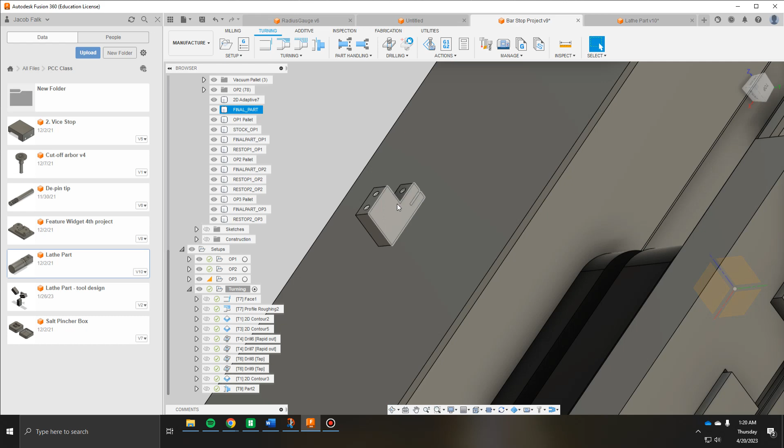So in the first video I showed you guys what my plan was for cutting out this part right here on a 3-axis mill. We were going to go from operation 1 to 2 to 3. You would start with this solid chunk, machine it into this part, flip it over, basically do the same thing on the other side, and then put it up on its side, and then you're going to drill your holes and finish the rest of the features.

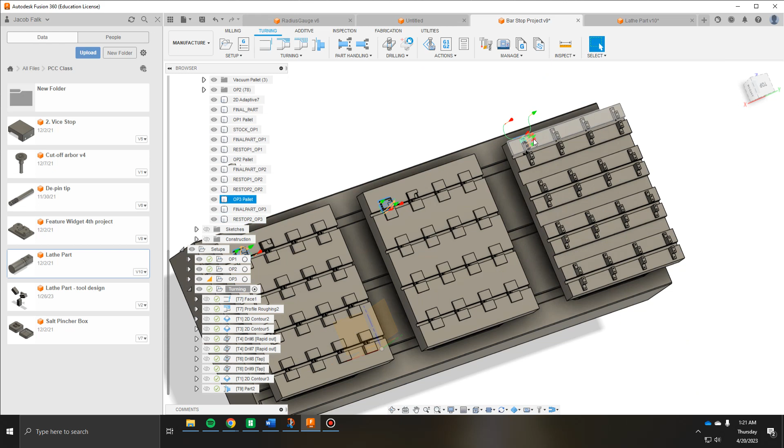Now this is a completely viable way to machine this part, but one of the downsides is that you have to process your bar stock, you have to saw cut every single one of these little pieces. The operator has to manually unscrew and screw in all these parts. You know, you're losing accuracy whenever you transfer from operation 1 to 2 to 3.

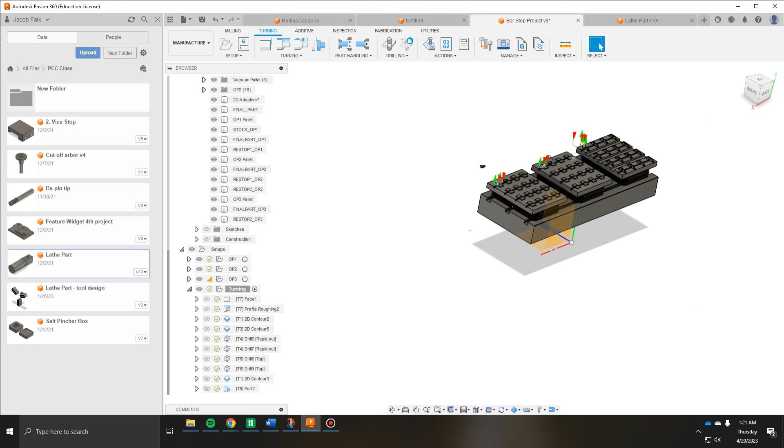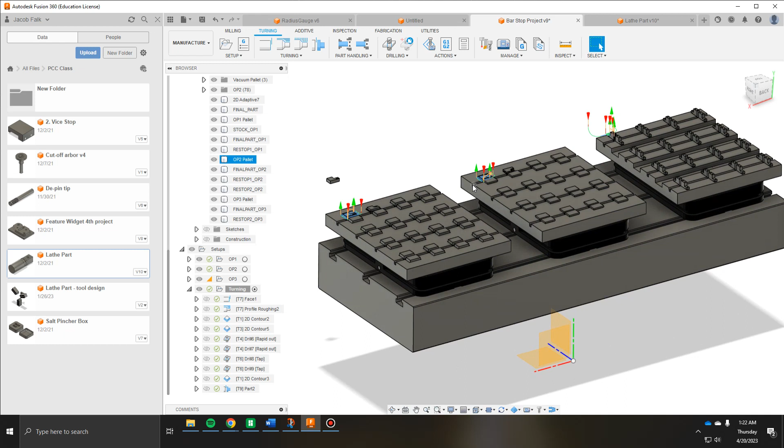And it's a completely sound way to do it, but in today's world we have lathes that have live tooling, indexable turrets, bar feeders, parts catchers, and those machines are becoming more and more common. So in my opinion, that's a much better fit for this type of part. So in the end, we'll break down the cost differences, the time savings between both.

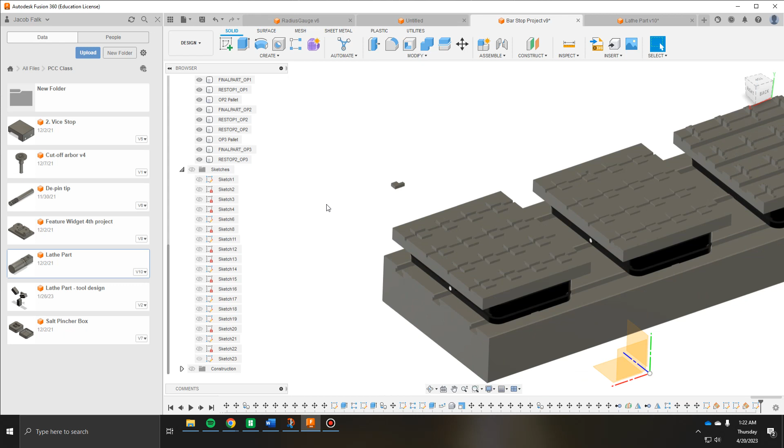But for now, I just want to give you an example of the CAD programming of this, which we already showed. And now I'm going to give you an example of the CAM programming of the turning. So let's go ahead and isolate this part right here, which is where we're going to be doing the CAM programming for the lathe. So we'll just come up here, isolate the final part, and then we'll go back to our manufacture workspace. Okay, so now we're in the manufacture workspace.

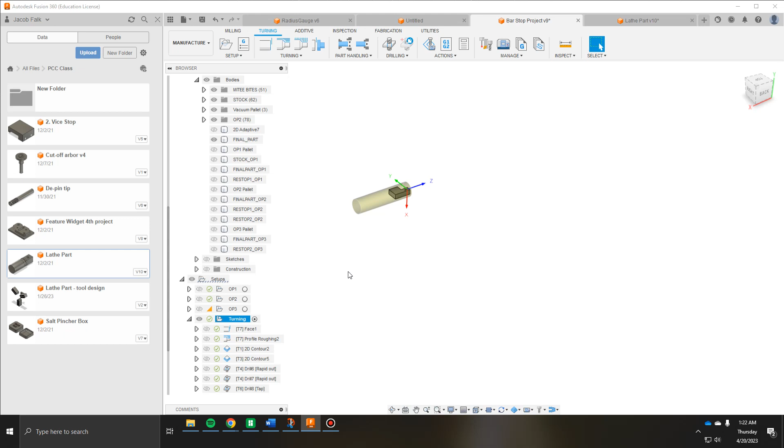You can see in my setups down here, op 1, 2, and 3 were for milling. We're going to turn those off because we're just turning. So here you can see all of these operations in operation 1, 2, and 3. These all got put into turning. I reposted them and I redid them, but basically all the features that were being cut on operation 1, 2, and 3 are going to be able to cut in one go off of a piece of bar stock.

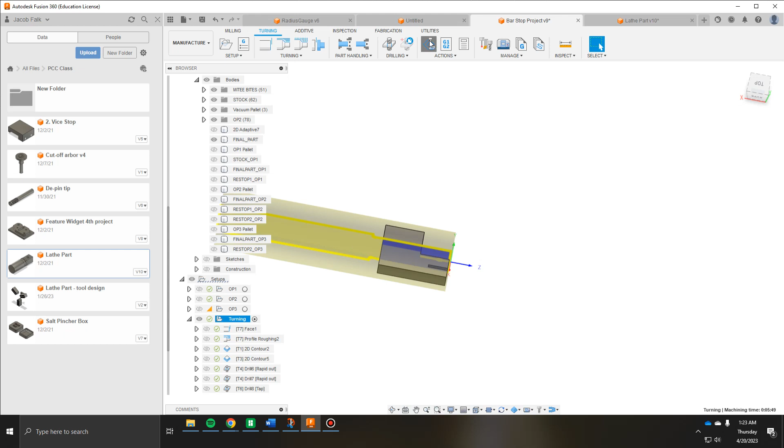So this is a 3/4 inch piece of bar stock, and we'll just go through the operations and show you how this can be done on a more advanced but still perfectly reasonable lathe. So let's go ahead and simulate, and we'll just go through each one of these. So let's get ourselves set up here. The orientation is a little hard to grasp. There we go.

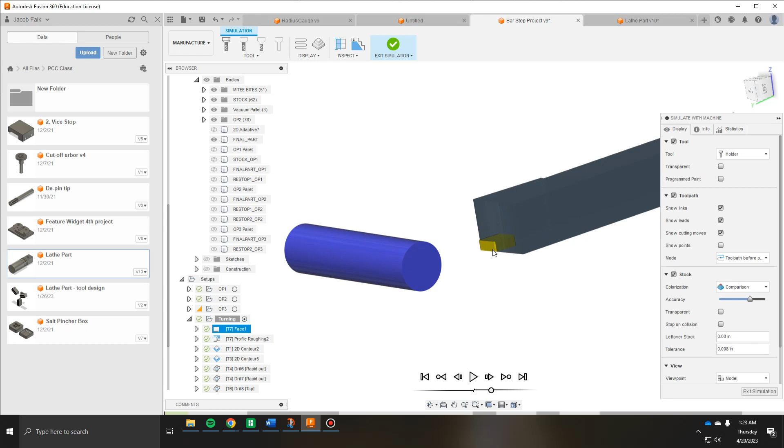And in case you're wondering, I didn't know this at first, but these tool holders right here for CNC lathes, they're upside down, so that as you're cutting the chips are fighting gravity and they're falling down away from the insert instead of falling onto the insert. It increases tool life. It's pretty common. It looks a little backwards and weird, but it's actually what they do in the real world.

So first we're going to start off by just facing the front of this part. Just going to come in and face it. And then we're going to go through and do a profile of the shape. We're just getting rid of that extra meat and getting down to the square of the part.

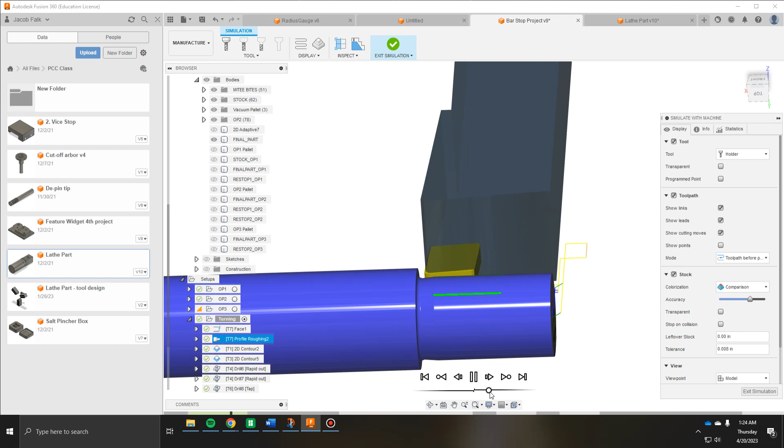So now that we've done that, we're going to come in with an end mill. So this is part of live tooling. You can put end mills on today's lathes if you have live tooling. So we're going to come through and do a couple passes and get this down to a square.

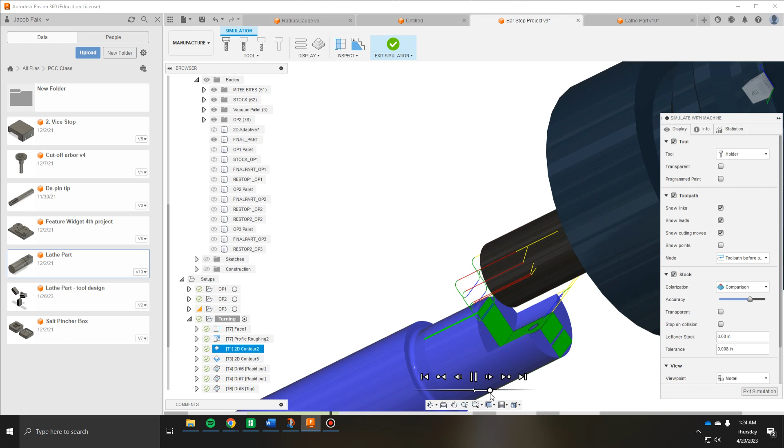So it does a couple passes, and then it does a final finish pass to get rid of 10 thou. And then after that, we're going to come through and do our slitting saw right here while the part is still relatively rigid. We don't want to save that for last, otherwise the part might not be rigid enough.

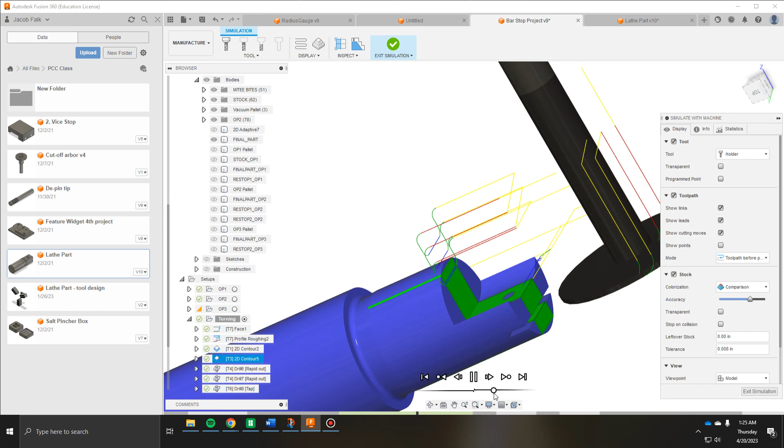So you're going to see that this is going to pull up and push back down. If I was actually cutting this part out, I would clean up that tool path because that's wasted motion. But since we're not actually doing a full production run of this part, we don't need to spend hours and hours trying to perfect the tool paths.

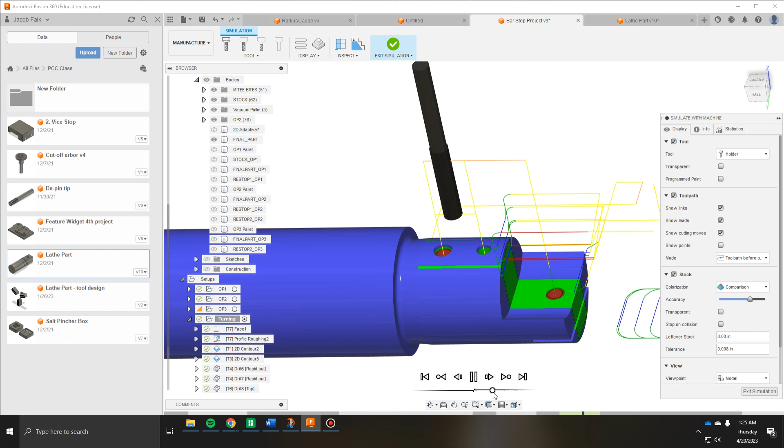So then now, while the part is also still rigid, it's going to go down and plunk all these holes in it. Hole there, hole there. Now we're going to go back and we're going to tap. 4-40 tap. I'm going to take care of those. Now we're going to come back with our end mill.

Now that our part is still rigid and we got all the features into the part while it was still rigid, now we can go back and remove the rest of the material. So just like the previous one, this one's going to do a couple of passes, and then it's going to leave 10 thou for a finishing pass.

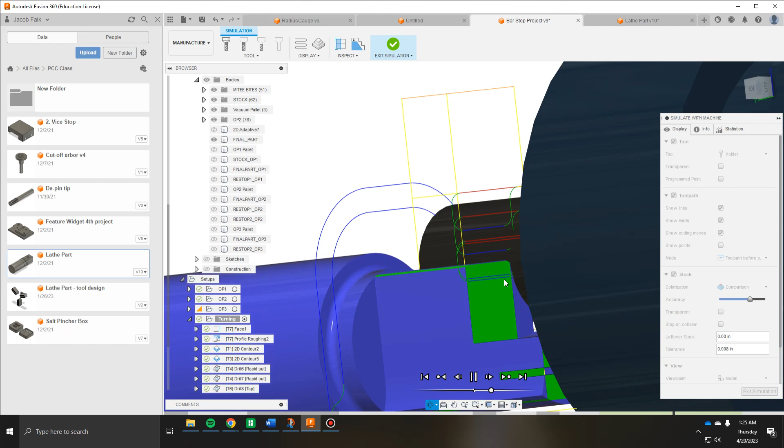You can still see there's a little bit of meat left. Now it's going to come through and remove all that. Great. So now you can see the part's actually almost done. So now we're going to come in with our parting tool and we're going to turn this part right off. So there you can see, it's just going to turn it, boom, and then we're done.

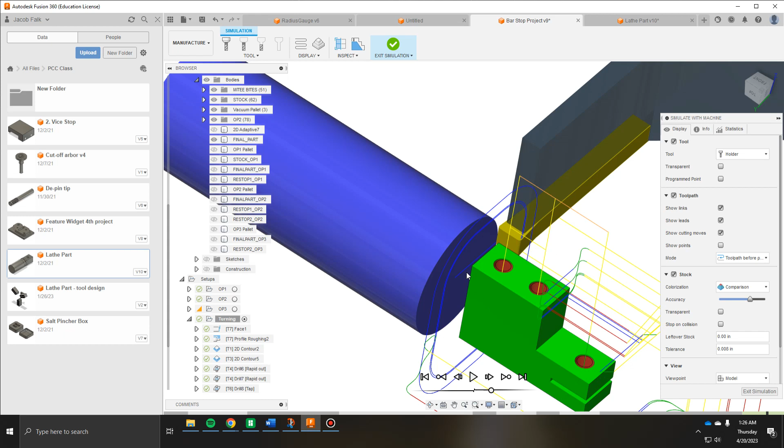So now at this point, this part would fall off into a parts catcher or fall off onto the conveyor belt at the bottom of the machine. And then the idea is that this machine would have an automated bar feeder. So after this part came out, this bar would get pushed up another couple inches, and this whole process would repeat over. So basically you take your part length plus the facing and the grooving, and you divide the total length of the bar that you have in the machine by that.

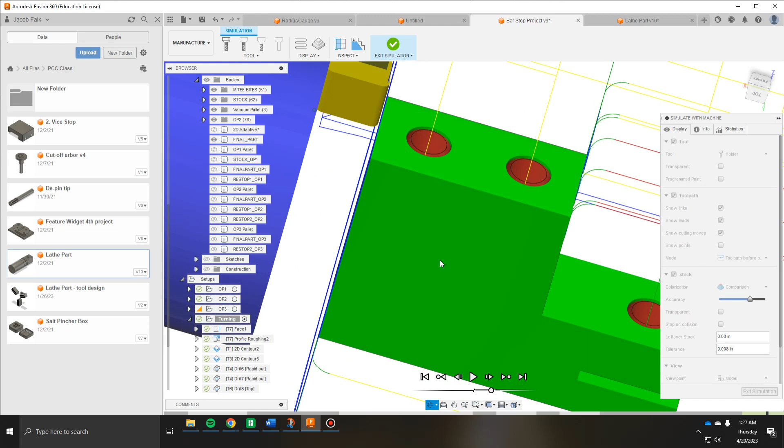And these bar feeders can have multiple bars. So if you had 5 bars that were 10 feet long, you could potentially run this part over a whole weekend and come in on Monday and have plenty of good parts. The caveat is that you would need to have your process dialed down to where there's no broken tooling and there's no surprises. Your tool management would have to be perfect. But that's definitely something that's accomplishable. You could have sister tools so that when one wears out, you could trade another one in.

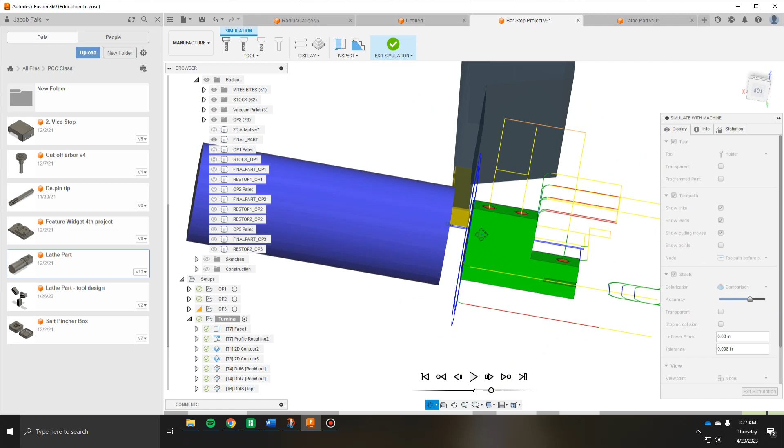But without even looking into the numbers of what it would cost to set up that mill and set up a lathe like this, you can kind of already get a gut feel for how much faster this would be and how much cheaper this would be. Of course, it's good to break everything down, but eventually you build a feel and you can see a part and know if it's a good part for a mill or if it's a good part for a lathe. And in my opinion, this is a much better part for a lathe because it can be automated so much easier. But that's just my take on this.